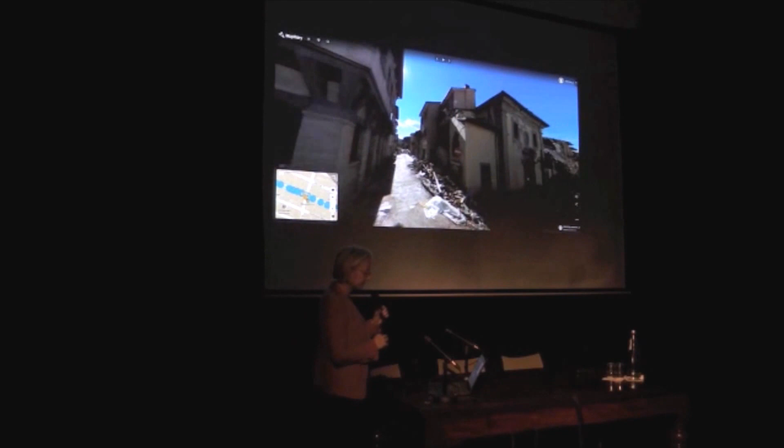Achieving this is possible for a new building. We know how to do it pretty well. It's more difficult to strengthen or retrofit an existing building to actually perform in the same way.

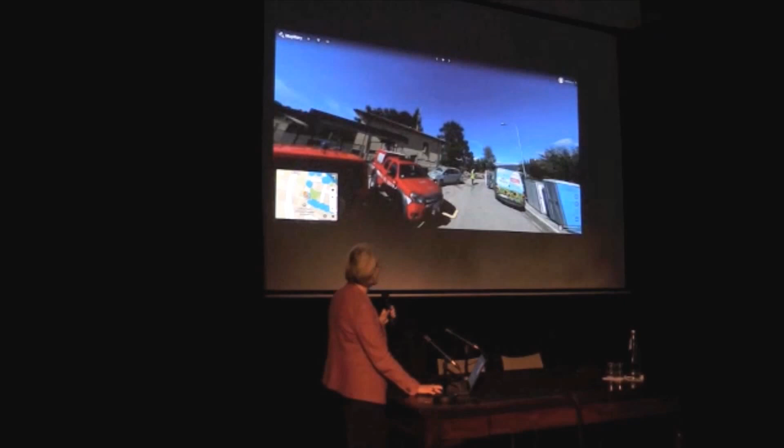And we have to say many of the buildings in Amatrice that you see on the ground have been retrofitted to a certain extent. So the question is why this intervention didn't work.

In the rest of my talk, what I hope to share with you is some evidence from past earthquakes of how far back the problem goes and what type of measures have been taken historically and also more recently. What is the typical recovery process, we'll see, and where we need specific knowledge and resources in order to ensure that the process takes place and concludes positively.

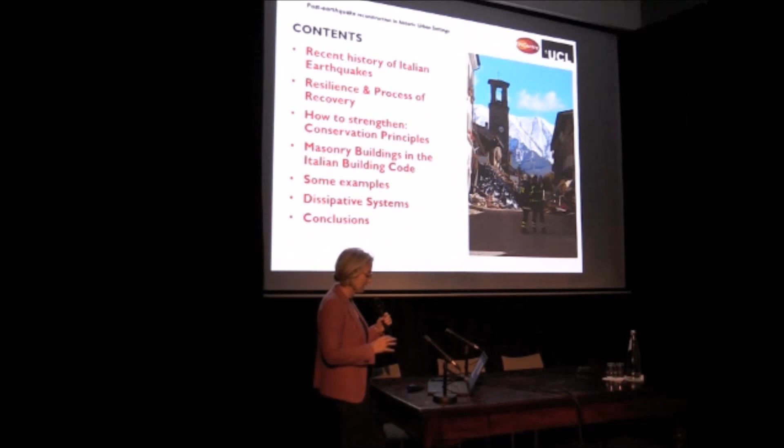We will then look at what are the Italian code provisions to strengthen historic buildings, and I will show you some simple examples from past earthquakes and also more recent attempts at strengthening buildings, including some of the research that we are carrying out at UCL, and we will get onto some conclusions.

If we look at our past, we can identify in the 20th century a number of earthquakes which had a devastating effect on the Italian territory, populations and economy.

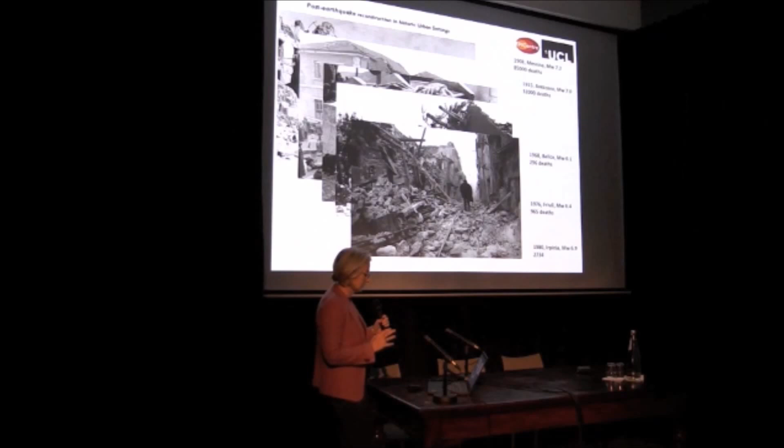As you can see from this photo and from the figures, although the magnitudes are not as strong as earthquakes in the Pacific, in Japan, or in the USA, in California, the effect has just been as devastating, if not more. I don't know how many in the audience have knowledge of these events, but as far as I'm concerned, it is after the earthquake in 1980.

As a teenager, I went there as a volunteer, and that's when I decided to become an earthquake engineer.

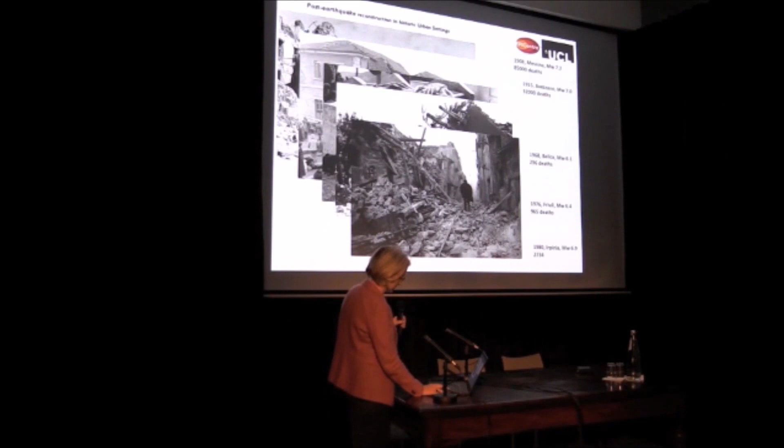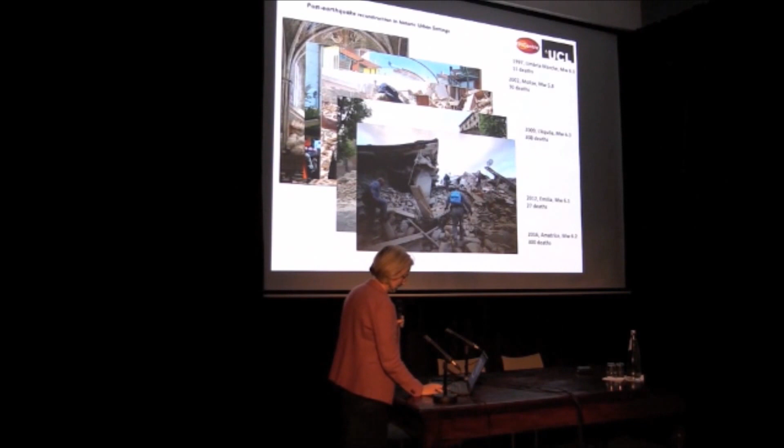Coming to things closer to our days, many of you will remember the collapse of the vault of the Basilica in Assisi, the deaths of several children in a school recently retrofitted in San Giuliano di Puglia, the death of several university students in L'Aquila in a reinforced concrete building that hosted a dormitory, the deaths of workers in reinforced concrete prefabricated factory buildings in Emilia, and finally the events in Amatrice that saw the death of many tourists who had gathered there for a pasta festival to celebrate the famous Amatriciana recipe.

The question is always why this happened and what are we doing to avoid this in future, and what have we done, and why are we not prepared.

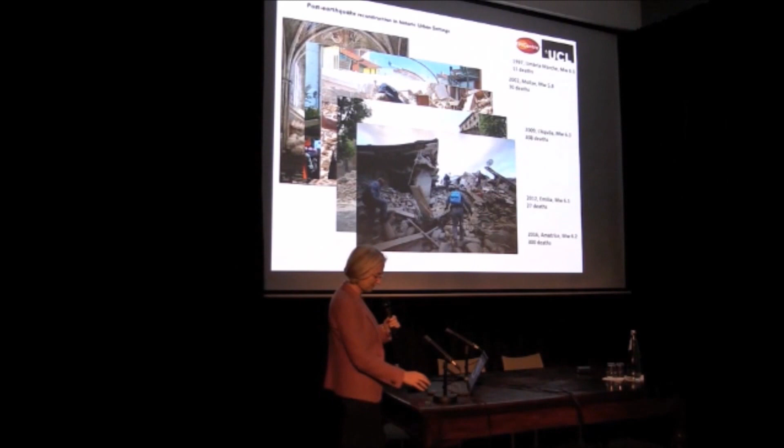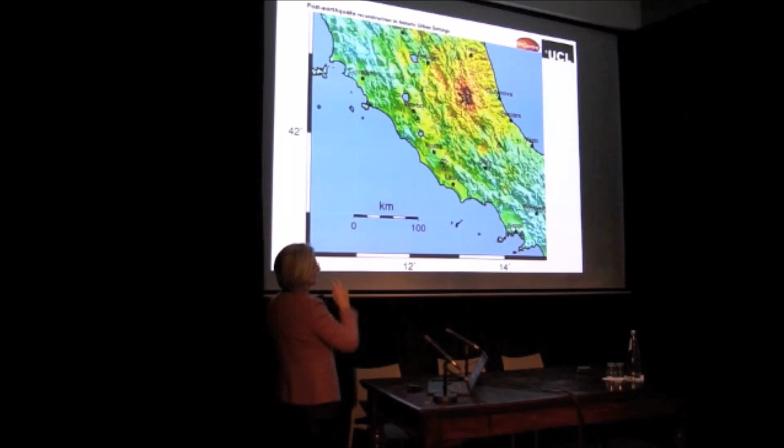But we can imagine that this is a relatively circumscribed and relatively isolated event.

However, again, if we take this slightly longer historical perspective, 40 years, you can then see there are 5 major, not so destructive events, but 5 events over the space of about 40 years: from 1979 in Norcia, then in Gubbio in 1984, in Colfiorito in 1997, then Gualdo Tadino the following years, then more recently L'Aquila, and finally the series of events of Amatrice, which I'm showing here from the 26th of August, but that was also followed by 2 other earthquakes towards the end of October and one more in January.

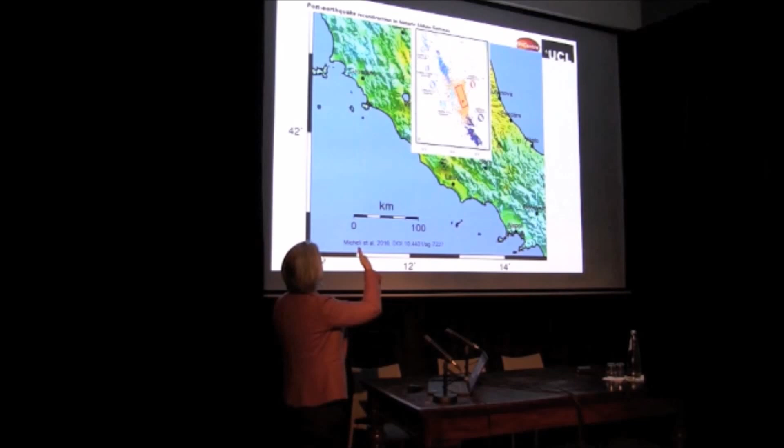So you can see that not only are the epicenters very closely aligned, those clouds of points represent the aftershocks, but also the aftershocks are very closely aligned, and altogether they very clearly identify the fault system of the Sibylline Mountains and the Monti della Laga, which actually historically caused all these earthquakes in this area.

So, knowing that there was an earthquake in Norcia in 1979, for instance, should have alerted the population, people, and authorities to the fact that there could have been an earthquake later on, north of it or south of it, and so on. And hence, did we prepare our buildings to withstand those earthquakes?

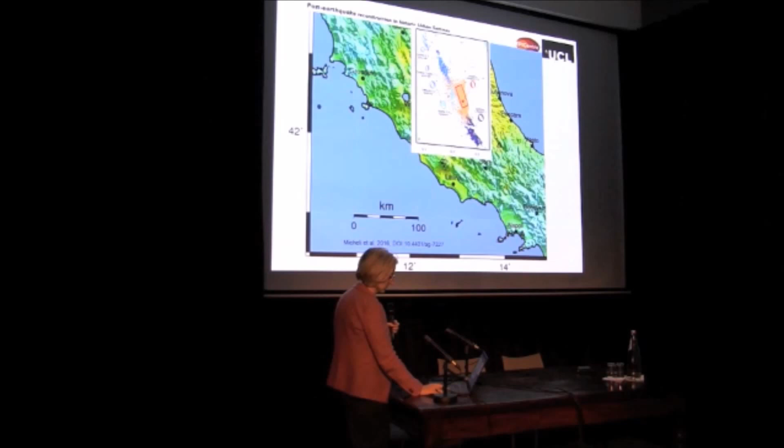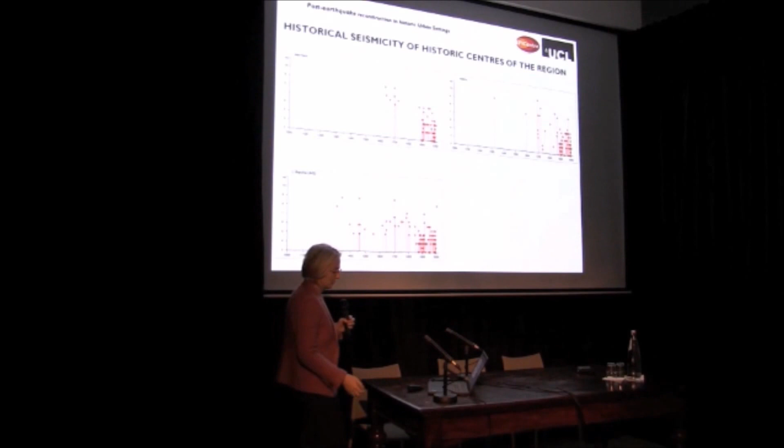Let's leave the end of the 20th century and go back in time. This is not new - we have records for Norcia or L'Aquila dating back to the 1300s. We also have records of these in paintings from the 13th, 14th, and 15th centuries, which show very clearly and pictorially exactly the same things we see today. So this has been happening for 500 years.

Our building stock is as old as these paintings in some cases. Very often when I speak to people from the United States or other countries, they ask: why do you keep living in these buildings? You know they are going to kill you. Why do you keep living in these buildings?

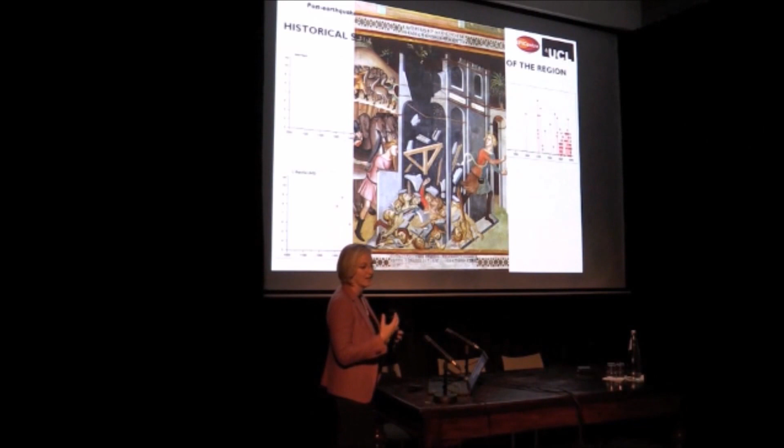The only answer we can give, to a certain extent, is that they are part of our heritage and part of our culture, and they represent, with their environment, the way in which many of us in Italy, but also in other parts of Europe, like to live. That's the main reason why we keep living there.

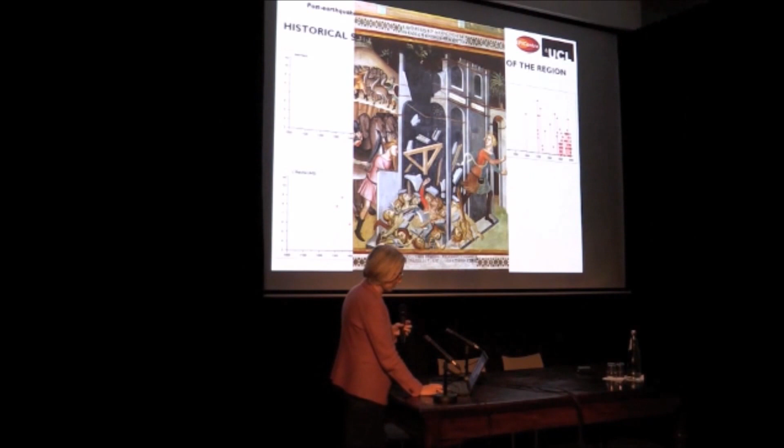But it is true that maybe we should try to do something about it. And indeed, we have done something about it as engineers.

The awareness of the seismicity of the overall Italian territory and the need to build better housing was first voiced publicly and nationally by Pirro Ligorio, in the 16th century. Later, after the earthquake in 1783 in Calabria, Italian engineers came up with what is referred to as Casa Baraccata.

Casa Baraccata was a system built in timber, meant as an answer to this very destructive 1783 earthquake to reconstruct Calabria. Some people say that the so-called Mezzogiorno problem in Italy can be dated back to that particular event.

However, in modern engineering terms, the concept of earthquake engineering and building to withstand earthquakes did not really meet scientific standards until 1908, after the Messina earthquake in Italy, but also contemporary with an earthquake in San Francisco in the same years, and similarly in Tokyo with an earthquake in 1923. So globally, the community came to recognize that something had to be done.

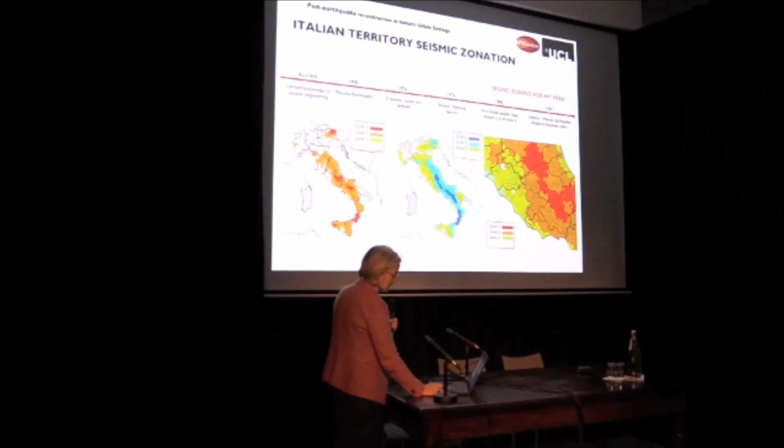And indeed, the problem becomes all the more stringent when we look at built heritage. What do we mean by built heritage? For the UNESCO definition, built heritage or architectural heritage is anything that has cultural significance - meaning it has aesthetic, historic, scientific, social, or spiritual significance, or any value for past, present, or future generations.

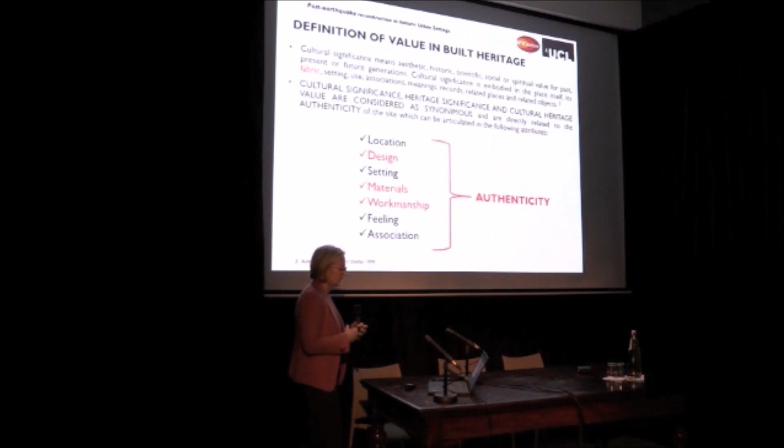Cultural significance is embodied in the place itself, in its fabric - meaning the materials and the way they are laid out - the setting, the use, the associations, meanings, records, anything related to the place and to these objects that we look at. This is the definition that ICOMOS produced within UNESCO.

In ICOMOS terms, cultural significance, heritage significance, and cultural heritage are synonymous. And hence, any building that has more than 100 years, by definition, because it's of interest for a past generation, a present generation, and a future generation, that is still standing, has some cultural significance.

From the point of view of how we identify that cultural significance, the keyword is authenticity. It has to be authentic, it really has to be what it was, and it continues to be. From an engineering point of view, the authenticity can be embodied in various elements, but what we are interested in is the design, the materials, and the workmanship.

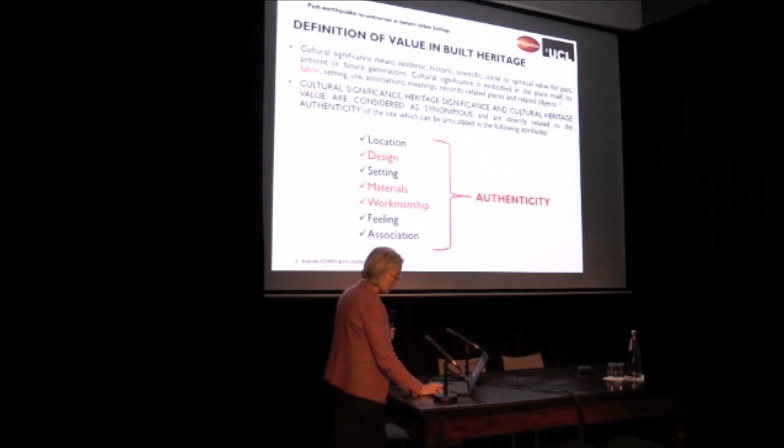That's what embodies what we call structural authenticity, or structural, and at the same time, structural integrity.

Why are these two concepts so important, and why should they go together? Because structural integrity allows the building to stand up and be reliable and safe. And structural authenticity provides, through the structure, the meaning and the value, the heritage value of that particular asset, object—in this case, a church.

What happens then is that we need to be very careful when we implement a strengthening procedure, because on one hand we want the authenticity to be preserved, so we shouldn't put in anything new or that falsifies the way the building works, the way it reacts. But at the same time, we need to preserve the life of the people who actually occupy the building. Hence, we need to intervene to improve a fabric and structure that we know very well is deficient, because this has been proven over and over.

So here I'm just listing some of the criteria that we, as conservation engineers, try to adhere to, among which the fact that the strengthening should be compatible with the original material, and should be durable so that it lasts and we can rely on it.

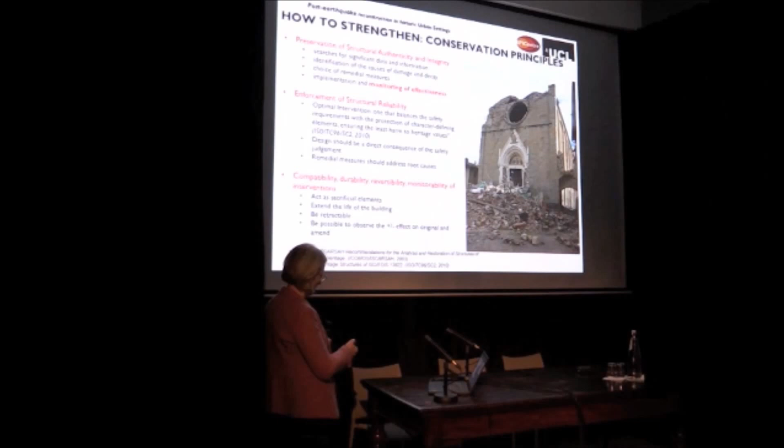So this is, let's say, what we try to adhere to in practice. I just want to show you here very briefly what an earthquake means for a building, or a number of buildings, and how we go back to what they were.

At time zero here we have the timeline: the building is damaged, so it loses its integrity and its capacity to withstand load. The day after the earthquake, we start with something we call tagging. Here we go around and say this building should be demolished, this building cannot be entered, this building is still safe and can be used.

We then start with debris clearance, and if the building is historic and valuable, we should also begin a process of documentation and storage—how many carved stones there are in this pile of rubble, that we would like to be able to reinstate once the building is repaired. What artifacts were in the church that need to be quickly removed and put into storage so they are not going to perish.

After this is done, we should be able to shore and make safe, which is something that didn't happen so much in this earthquake, while it was extensively implemented after the L'Aquila earthquake, for instance. There has been a lot of debate in the news and elsewhere about why this didn't happen. And we also need to demolish things that are not safe and that can fall on people's heads.

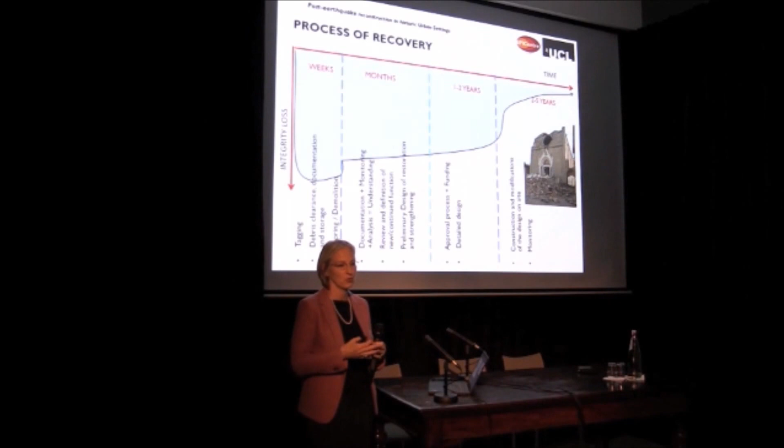Assuming that the funding process, either through governmental funding, which depends on the political system, then we can start developing what we call a detailed design, so start thinking specifically of what it is that we will do. And as you can see here, things can be done so that the building slowly is going back to its original state.

Possibly we start here in a space of 1 year, maybe we go on site and we actually build it up, and then slowly again the building is, maybe we will need to change things from the detailed design because again we find out new things while we are on site. And this process altogether might take up to 5 years.

Indeed, soon after the earthquake in Amatrice, there were some studies done in the Emilia region because it was just about 4 years after the earthquake there. And in many cases, especially for historic buildings, they are still in this phase. In the case of L'Aquila, we all know that 7 or 8 years have passed now, and possibly we are still in this phase for many buildings.

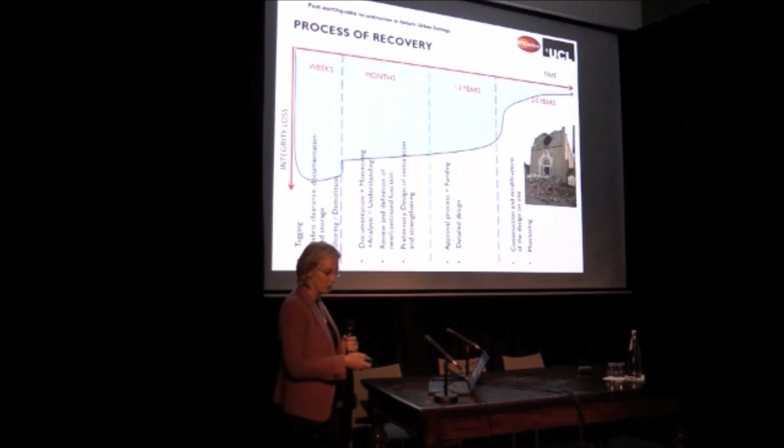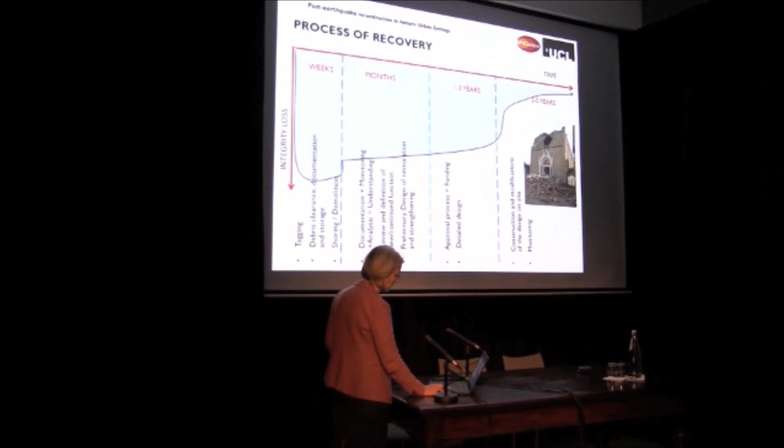So, although I've given a time perspective, this is not always responded to. So, what are we doing when we talk about preliminary and detailed design? What is it that engineers can come up with that can make buildings work better? Now, like with everything else, the technology moves on with time, and we find out, for instance, that when you have a hip replacement...

Well, the metal head was a good solution in the 80s because stainless steel was supposed to be the best thing possible. Later on, they substituted that with titanium. Then they found that titanium was very heavy and it produced a lot of problems for the muscles. You were not quite able to lift your legs anymore. And so now they have replaced this instead with FRP, fiber reinforced plastic, which is as light as bones, and possibly, we don't know whether they will wear out quicker than titanium, but if they were, they will replace the hip again, possibly.

And similarly, in earthquake engineering, in the 70s, all our knowledge was based on reinforced concrete. And there was very little understanding of the relationship between our reinforced concrete work and our masonry works. And as we were able to design nice reinforced concrete frames that withstand earthquakes, we all thought that, well, let's put as much reinforced concrete in a masonry building, and if we stiffen it enough and we give it a certain box behavior, it's bound to work well.

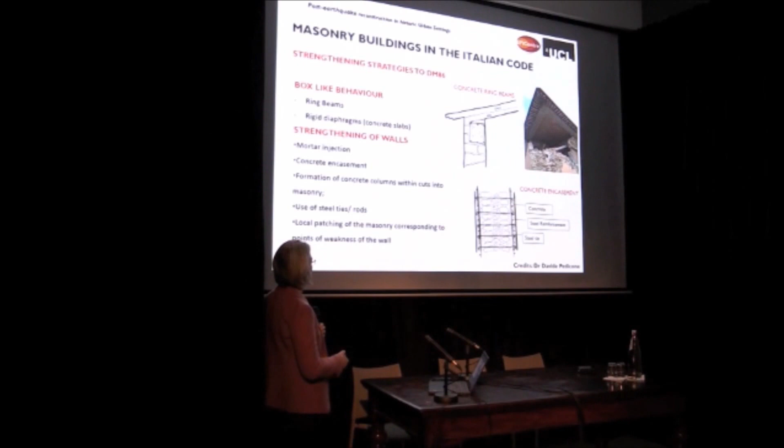And so away we went with what we call a ring beam, nice roof plate made of concrete slabs, with any walls that was made of stones and mortar. We sort of shotcreted or covered it, encased in concrete, in the understanding that the concrete will do the work where the masonry was not capable of doing it.

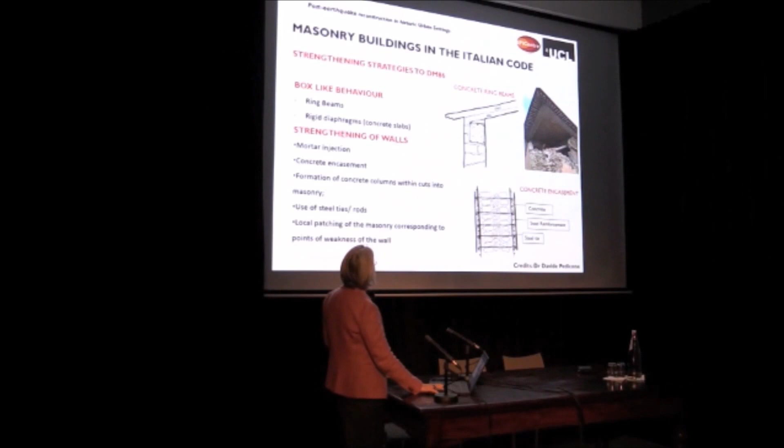Other types of intervention, and these strengthening strategies were recommended in the ministerial decree of 1986. So after the 1997 earthquake, there was clear understanding, and there was plenty of evidence that actually this type of strengthening didn't work well.

For instance, the collapse of the vault in the Assisi Basilica indeed was due to the presence of a very stiff ring beam with roof slab, which caused the failure.

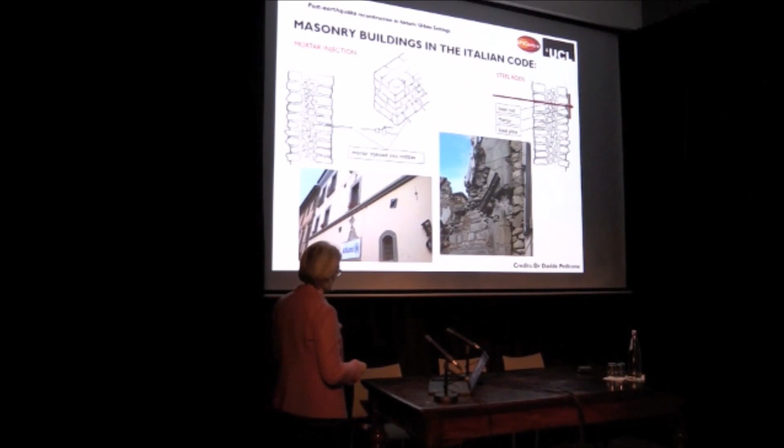Things that in the meantime we found out that might work better is to actually inject the masonry with what we call mortar grout, which works better in connecting the stones there, but still relies on the stones and the mortar to do the job rather than external concrete. And also, we realized with some work done by my group and others, that ties, which were already used since the 18th century, are actually a very good tool to make the building behave.

If we needed, as I said, there was already evidence in the earthquake in 1997 that ring beams didn't work, and in fact in the L'Aquila earthquake in 2009 we had confirmation of this, because basically all the churches that were damaged in the L'Aquila earthquake and the main Duomo, the main cathedral. You can see the ring beam here, and you can see what that caused.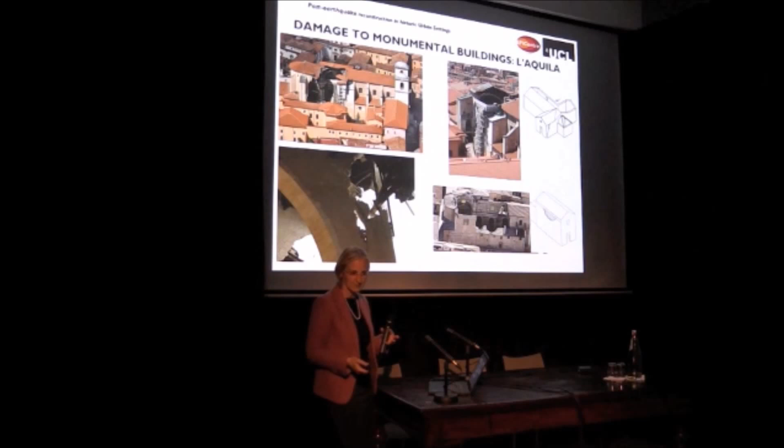This is the Collemaggio Basilica, where you can see the ring beam hanging from its reinforcement out of the top of the arches, and there is a big gaping hole similar to this one. And this is the Santa Maria Paganica church, where again we have exactly the same type of damage and the same type of reinforcement. All of these roofs were substituted between the 60s and the 70s in the genuine belief that it would improve their behavior.

Again, further confirmation of this we had in Norcia. This is what is called the Contro Cattedrale, because it's built just in front of the main cathedral of San Benedetto, which collapsed. And here you can see that there are buttresses in this wall, which were inserted in the 18th century, after the earthquake in 1703.

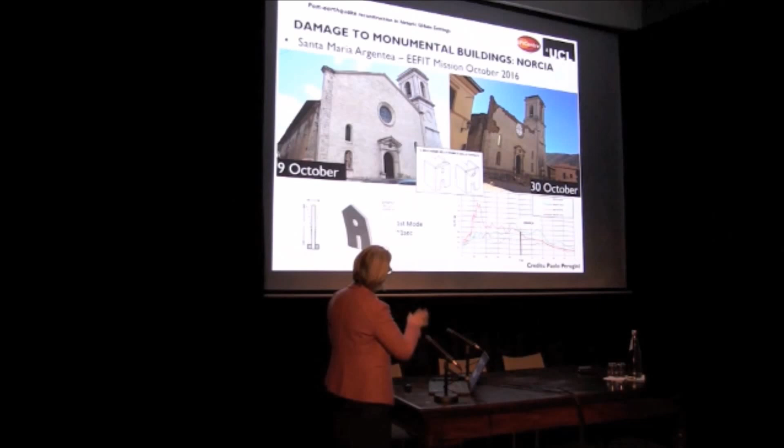This wall is still standing, and the campanile, which is all tied up with anchors, is still standing. The facade, which is behind here, and the reinforced concrete and steel structure that was supporting the roof, was actually damaged in the earthquake of October. There are also some other more technical reasons why the damage occurred, but this is not so important.

This is a building in Arquata, which, as you can see, is in very poor condition at our visit 2 months after the earthquake. This building is very interesting because virtually every single reinforcement and strengthening device that the engineer thought of through the time had been included in this building.

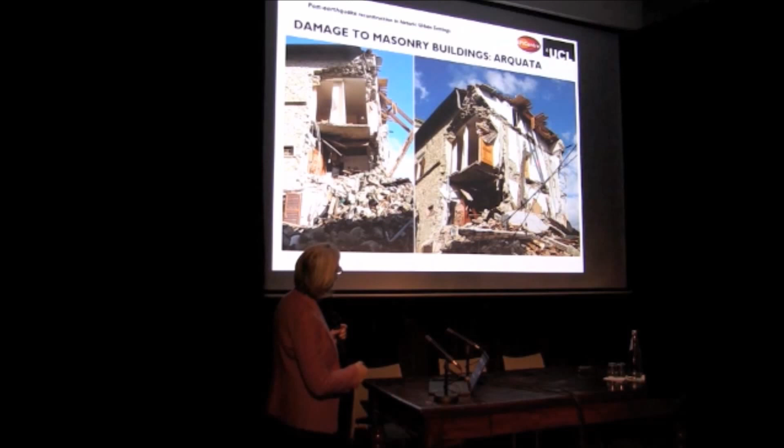At this level we have reinforced concrete slabs. Then up here in front we have some anchors that didn't seem to work well. Then later on here you might see some joists that are coming down. And if I change picture and we look at the other side of the building, you can see the joist hanging here. So this was basically a very modern type of reinforced floor.

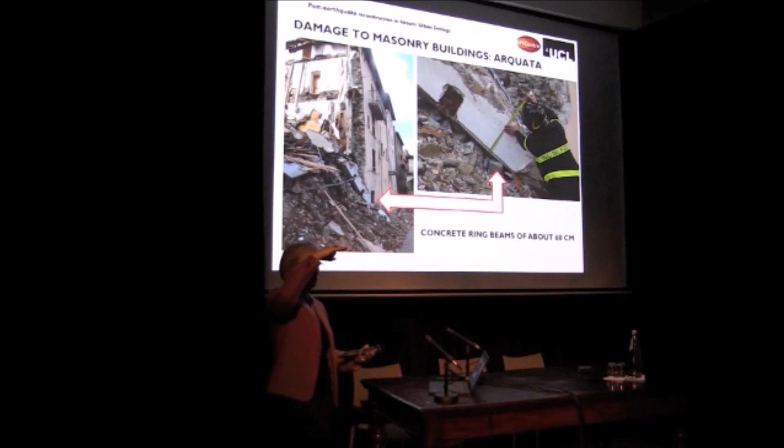And here you can see these are the spaces for the roof beams, and this is a concrete ring beam which has come down 4 stories, so about 15 meters, and it's like 600 millimeters deep, made of concrete, which is very heavy, on top of masonry, which, as you can see, is made basically of very round stone and mortar. So the surprise is that it stayed there for 30 years, not that it came down.

And the first shaking, unfortunately. But of course, it's very easy to make judgements with hindsight. And so one needs to be very careful.

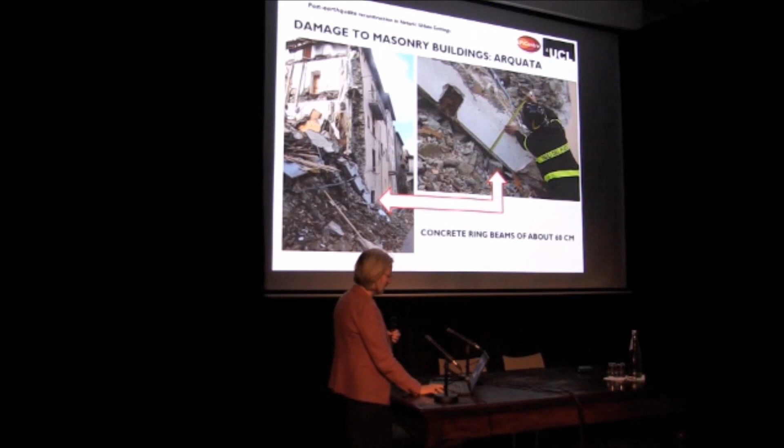More recently, after the earthquake in 2009 and with the research work that we have done in the last 30 years, we have identified a number of things that work and don't work. So we have, for instance, identified a way of obtaining the same effect of the concrete ring beam without putting a concrete ring beam, simply by improving the way in which the top of the building is built in masonry. For instance, using FRP, fiber reinforced polymer strips.

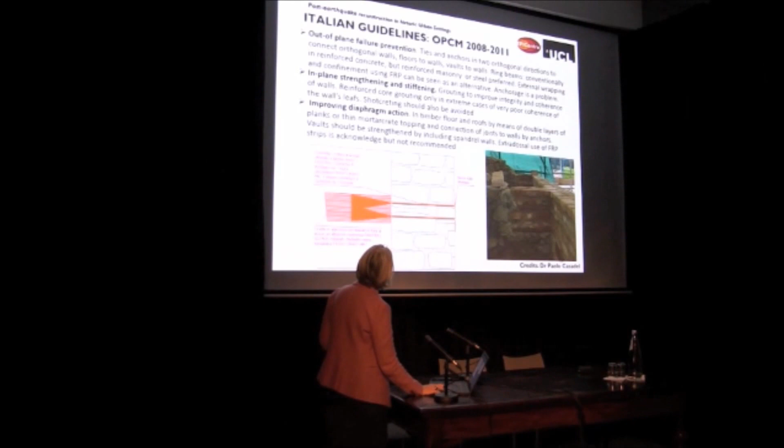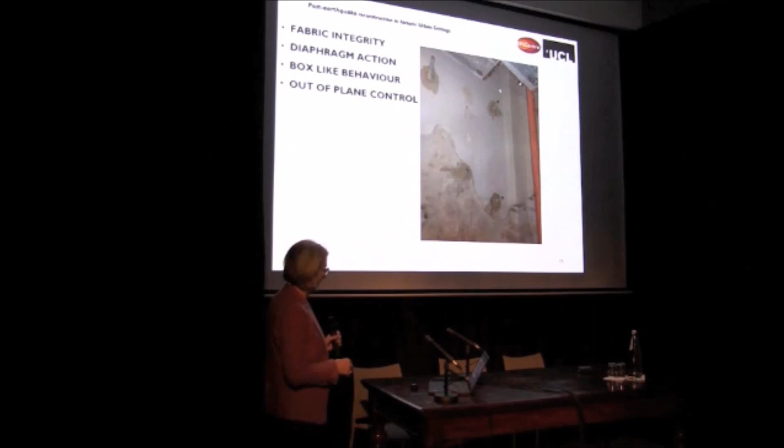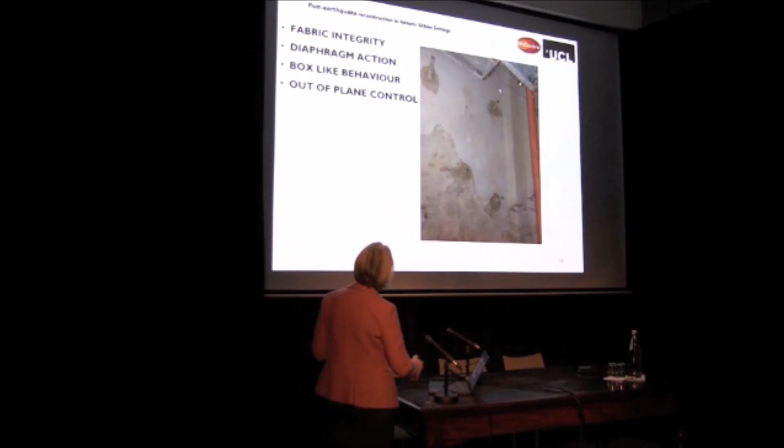However, when we went on a visit 2 or 3 years ago in L'Aquila, when we were looking at some historic buildings that were restored, we looked at buildings being grouted, and this seems to work well. But although the code recommendation says that this type of intervention is not recommended, there is no proof that it works. It's extensively done because it's very cheap, quick, and doesn't require as skilled labor as putting brickwork here to reinforce the walls.

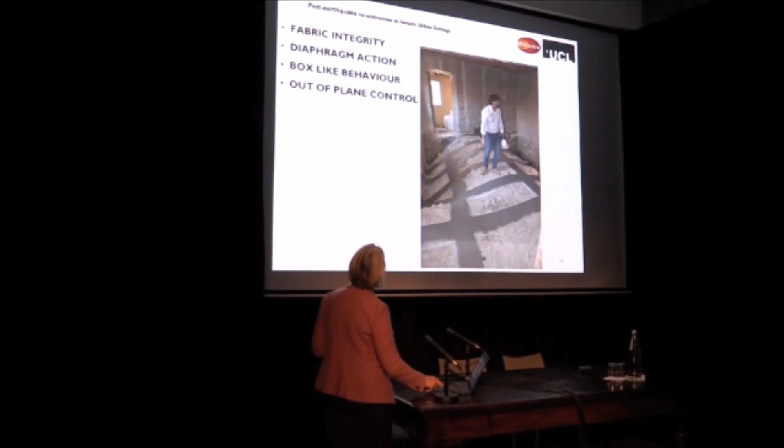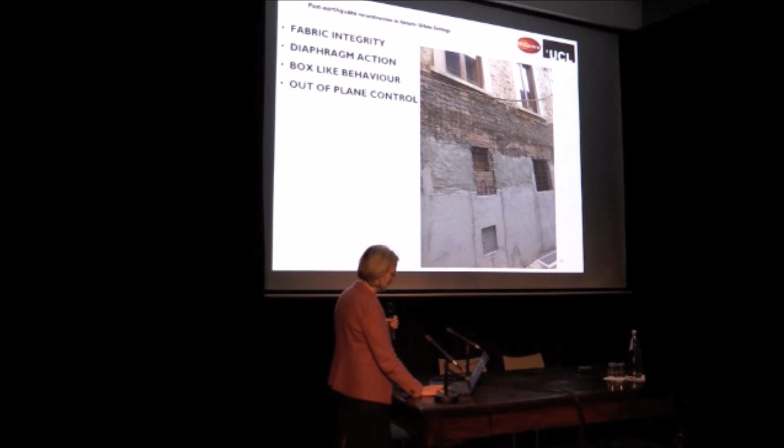People still coat their masonry in concrete, although there is plenty of evidence that this doesn't really work well. So there is also a matter of how we educate and improve the understanding of the profession at large in order to improve the behavior.

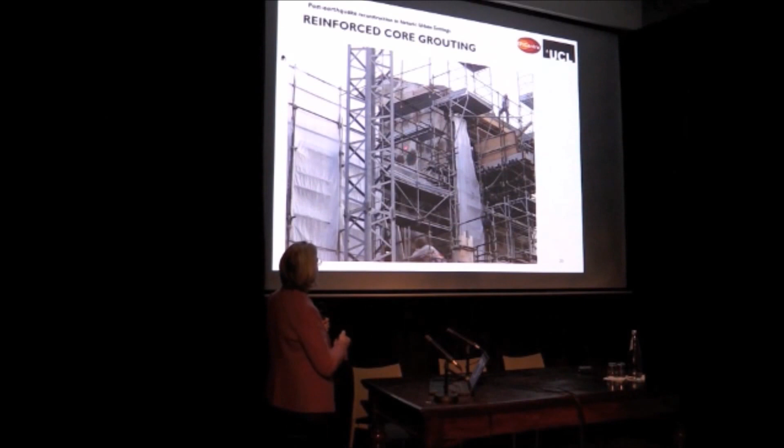This is an intervention in L'Aquila using a very recent technology, which is the use of FRP, basically drilling through the thickness of the wall and then inserting FRP bars and post-tensioning them. The idea is that this should be more effective. You can see here where each of these stains on the walls is actually an FRP bar that has gone through. This is a close-up of it so you can see how it works.

There is no evidence that this is actually going to work. Nobody has tested it properly. However, in L'Aquila, almost all the buildings have undergone some of this work, just because the contractors know how to do it. Somebody, the supplier, sells the FRP, and this is what is being approved.

And of course, when you look at this, this is a building of the 18th century. Think about the authenticity and think about the maintenance of the historic value of this building.

There are things done properly. This is Palazzo Ardinghelli, still in L'Aquila, and here my colleagues have gone back to the idea of the ties and the anchors, the traditional anchors, and simply used them in a more systematic way in order to obtain a systematic response.

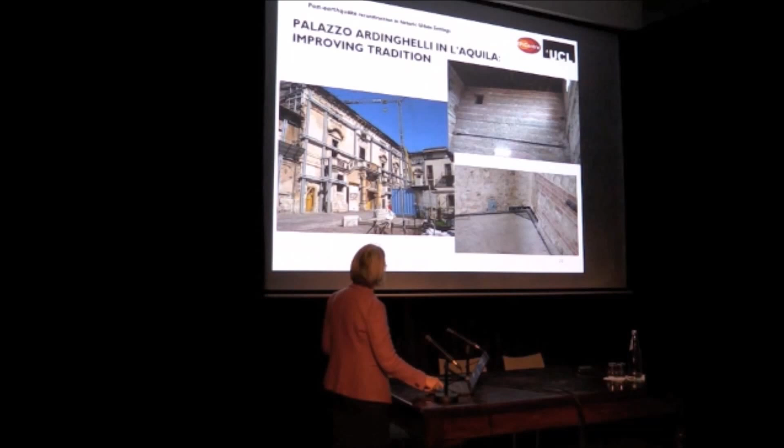And this is the finished product, and you can see they are quite unobtrusive. You see very little of them. From an architectonic point of view, they don't disturb the facade. It's not too bad. And next to it, you can see a building that had traditional ties in L'Aquila.

As you can see, this building is still standing, so people have been able to evacuate safely, to come away with their life. However, the building is seriously damaged to a certain extent, irreparably, and hence it will need to be either newly restored or very seriously altered.

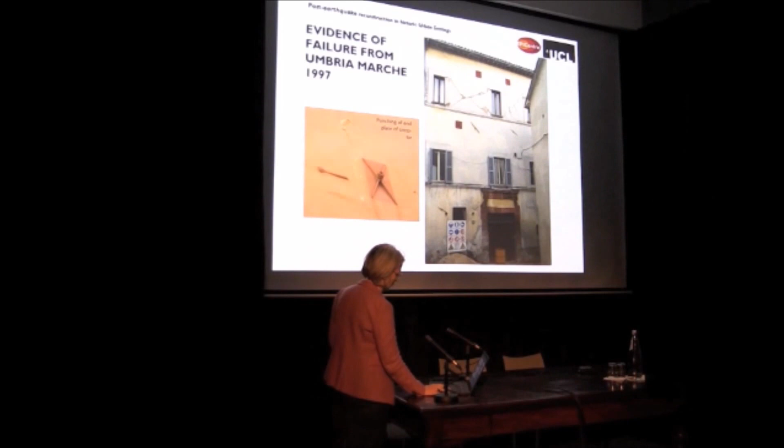So it's with this in mind that recent work that we are doing, work that we started in 2010 when I was at the University of Bath, that we are now bringing forward at UCL. We work on what we call a dissipative device.

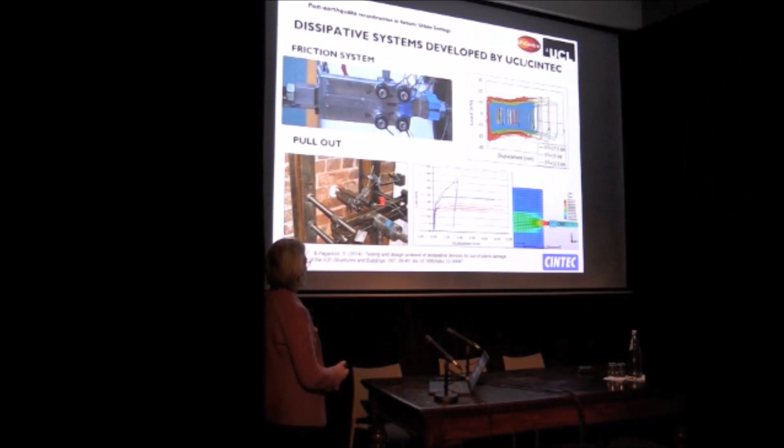This is a friction device that we can put in series with traditional anchors, and simply when the earthquake, when a force is exerted more than a certain amount, it will start sliding and in this way start dissipating. This object has already been patented.

In order to make sure that it is a feasible pursuit, we have had the possibility of putting it in situ in a building that had been damaged in L'Aquila, in the oratory of San Giuseppe dei Minimi, and you can see here there is a very clear crack that separated the main facade from the rest of the building.

So we inserted our anchors, which is this one. This is the front of the anchor that goes on the facade. This is our device here, and this is the back of the anchor that goes into the side walls. We inserted it here.

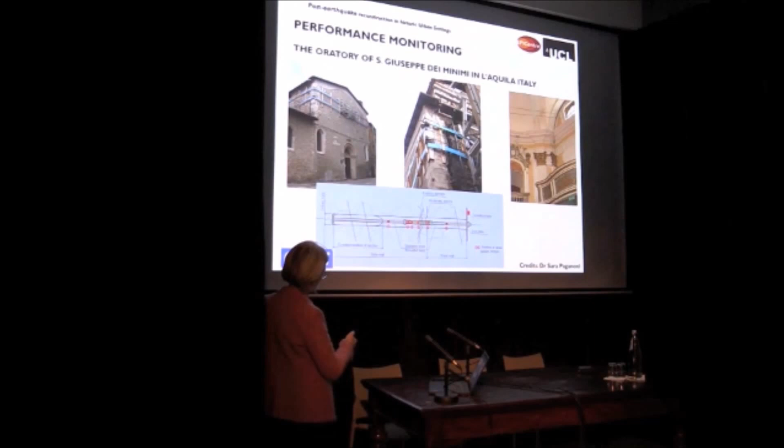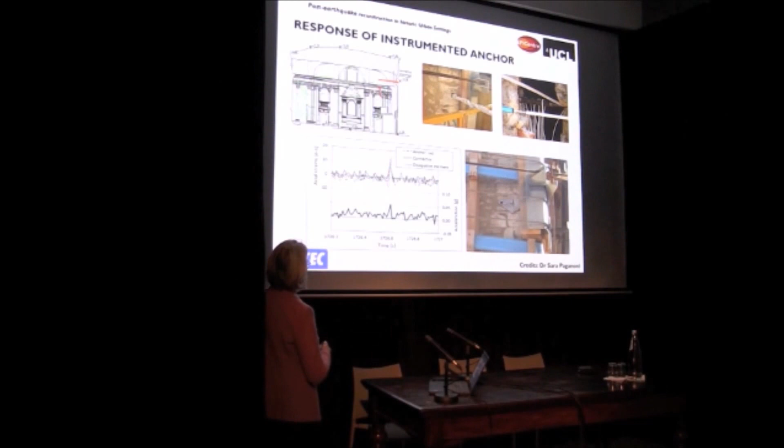And we instrumented the anchor so as to be able to see whether it's effective when there are tremors. We managed to pick up some tremors during the year in which it was kept in place, and we can see that the dissipative element is responding more than the other elements, actually dissipating more energy than the other parts.

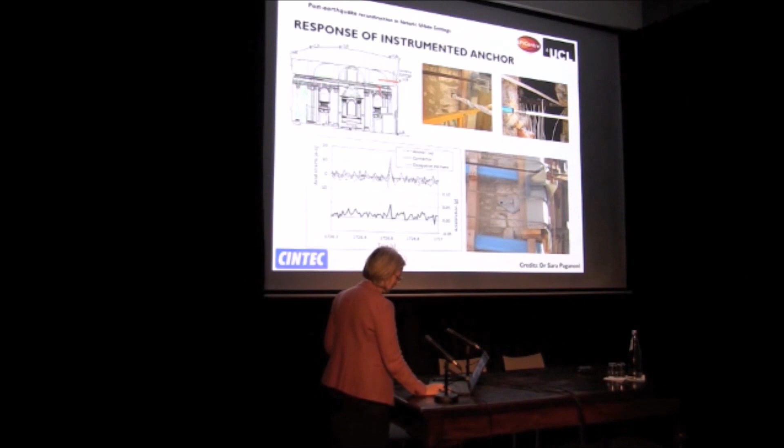This is one particular case that proves things up to a certain point, but we are in a position to simulate the behavior of these objects with numerical analysis and also with laboratory testing, and hence determine the behavior and arrive at a situation in which we can design each of these interventions building by building specific, and manufacture them in such a way that they are specific to the buildings.

This really concludes my presentation. Just to say that the earthquake engineering community indeed has shown an increased sensitivity towards the importance of preservation of historic buildings, and promotes research into the assessment of new strengthening methods.

This is reflected in the code provision, although we are not quite there. As I said earlier, the real issue is how to train and how to update the ability of people on the ground. It's good that in academic circles we do these things, but it has to get to the single building.

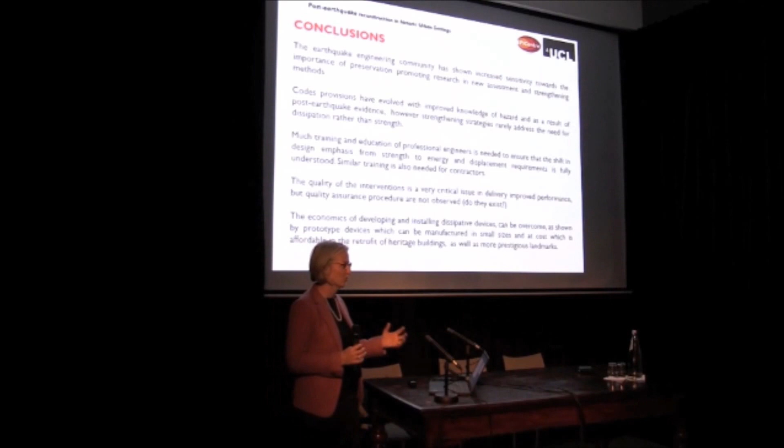A very critical issue is how the interventions are implemented and the quality control behind the contractor. When you have a large number of buildings that you need to retrofit or repair, it's very difficult to control that each and every single one is done properly. I don't know whether in Italy a control system exists and is effective on the ground. It exists, of course, on paper, whether it's effective on the ground is also a problem not just of Italy, but any other country in the world.

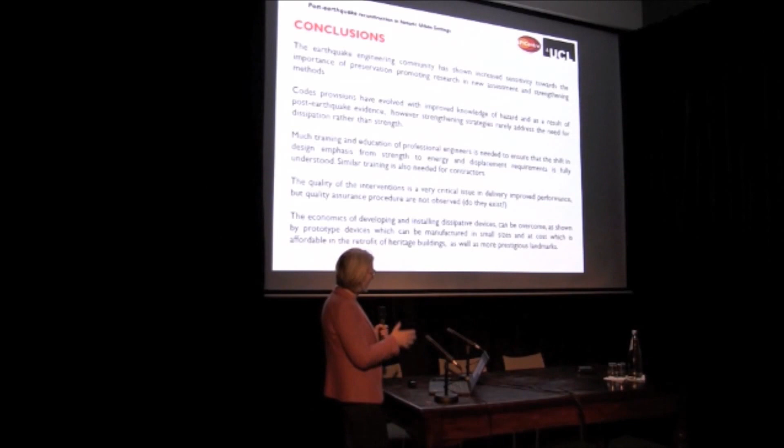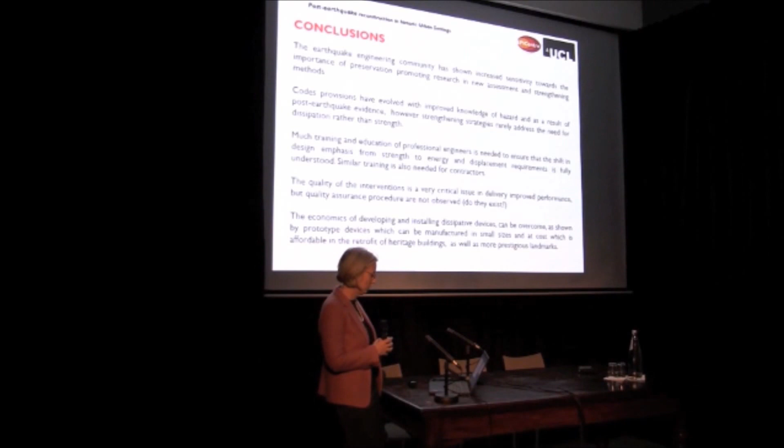I think we are proving, and that's why we are now investing more efforts and money in further developing these devices, that they can actually be a new and more efficient way of preventing damage in historic buildings. Thank you very much.

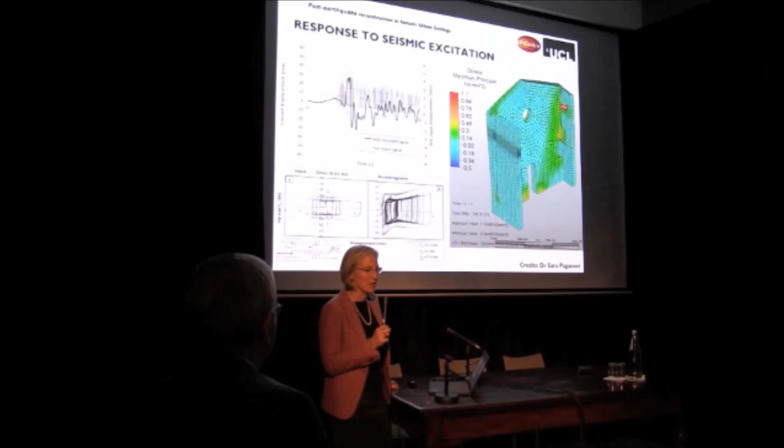Yes, to an extent. Of course, we don't really call these simulations, we call this numerical analysis, which is a slightly different thing than a simulation. It depends, of course, these are models, and when you model something, you are abstracting from reality and reducing it to something you can actually deal with using your tools. So by default you are eliminating some issues, you are simplifying.

Nonetheless, the numerical tools we can use nowadays are quite sophisticated, and as long as we have sufficient documentation and information to put in as correct numbers as possible, we will have responses that are credible and realistic. So when I initially mentioned the period of study, documentation, collection of information and so on, which can take some months, this is exactly to produce, for any specific building you want to intervene on, the set of data and information good enough to warrant going on to do a study of that type. These simulations, this is a relatively simple model we're showing here, but they can become quite complex and take quite a length of time to produce results. So it's worth investing in something like that once you have good enough information to put in.

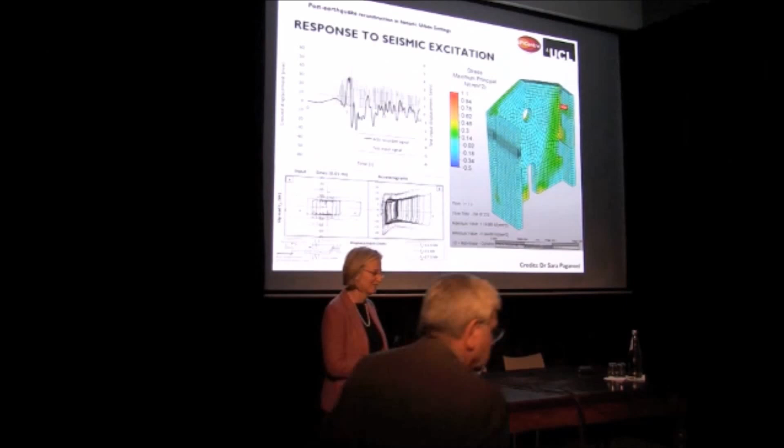Thank you. I don't know anything of the subject, so just a really simple question. I guess there are two ways in which the soil itself, the nature of where the earthquake is taking place, can affect: A, how a building is affected, and B, how it's reconstructed. I always thought the more flexibility a building had, the better in it not falling down. On the other hand, if you have very movable soil, like near a coast, you would imagine the whole thing can collapse more easily. When it comes to building, how do you take the soil into account in terms of achieving that optimum flexibility without the risk of it being very difficult?

Yes, well, this is a very pertinent question, and it's very difficult to answer in a few words because it requires, let's say, a whole program in earthquake engineering, as some of the people here have gone through. But nonetheless, I'll try to explain it as clearly as I can in a few words.

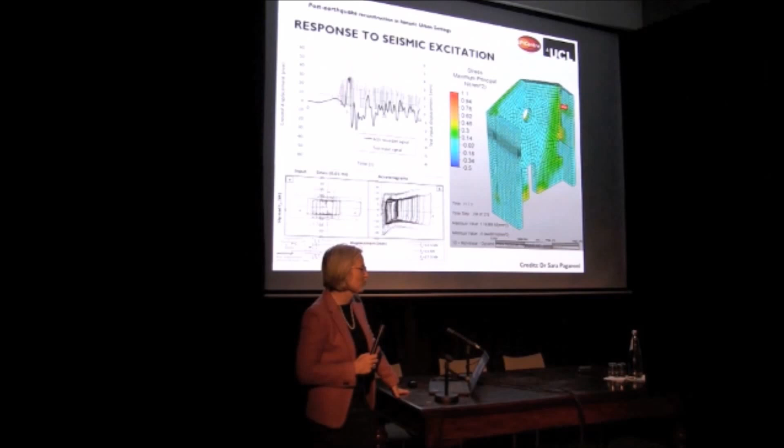Italy has had earthquakes, as you illustrated, for hundreds of years—we have records that go back to the Romans, and in fact before the Romans. And still today we have very damaging earthquakes where people lose their lives. Now, if today you had enough money to fix all the buildings—has somebody evaluated how much money is necessary to fix all the buildings in the seismic area of Italy, which is essentially all of Italy? Because otherwise, next time an earthquake comes, no one has done anything. So how much money is necessary? And the second question: once the money problem is solved, is there a consensus on how? Is there a consensus in the scientific community on what should be done? Because from what you say, I have the impression that not everybody thinks the same way. So if somebody has enough money to fix the entire central part of Italy where there is this serious problem of possible future earthquakes, would there be a consensus on what to do?

Okay, again, two very interesting questions. I think the National Association of Engineers made a rapid calculation after the earthquake in Amatrice and came up with a figure of something like 89 billion euros—I don't know why not 90, but 89 billion euros—which is a considerable amount of money.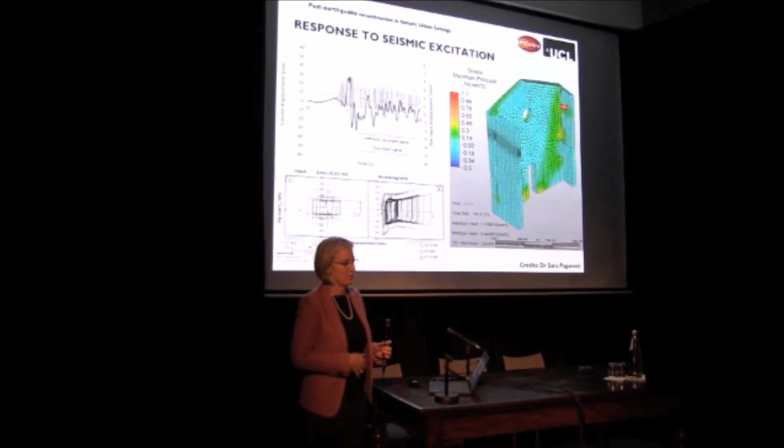Money for retrofitting, as I said, after the 1997 earthquake and after Amatrice was reclassified, they received money to retrofit their buildings. Now, some did, some didn't, and the building came down anyway. But almost all the cases I've seen, the retrofitting with the 60-centimeter concrete ring beam that I've shown you was so that you could gain some space under the roof and, to all extent, have another floor to rent. So it's an investment, but you are playing with your life.

So are you ready to do this? I think it's until there's a more widespread safety culture that it's very difficult to implement a proper program of retrofitting.

In terms of the community, I think that, as I said, at the academic level, there is substantial agreement about what works and what doesn't, mostly agreement about what doesn't work.

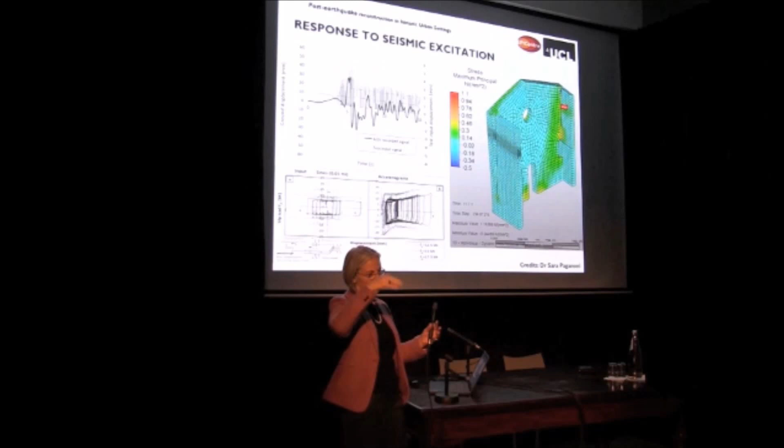This is a very acute observation, because what we have seen both in L'Aquila and in Amatrice is that in 3 to 4 story buildings, many have collapsed, but the ground floor, which was vaulted, is still standing. This is because typically that vaulted first floor is built with very large walls, so the vaulted structure doesn't have much of what we call thrust - it pushes, but the wall is capable of taking that push. Also, buildings at ground floor are very often built one against the other, so they are very stable.

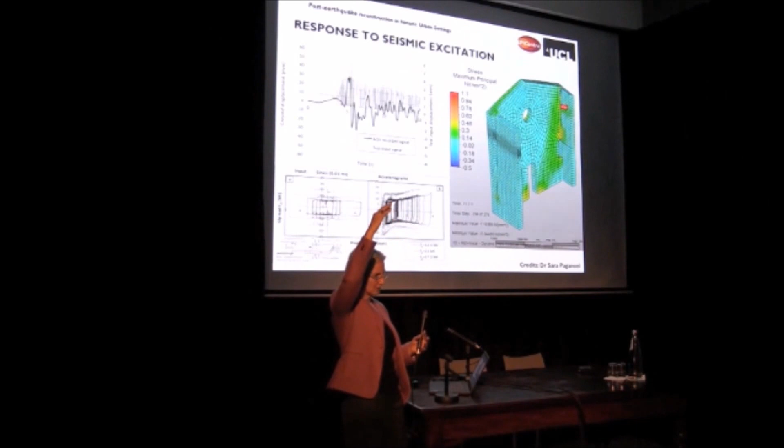As you go up in stories, in some architectures you will also have vaulted structures at a higher level, although they tend to be thinner. For instance, in L'Aquila, you would have it at the first, second, third story, but they will tend to be very thin, cross vaults and so on. In churches, if they are not properly buttressed and propped, they become a liability. So are you saying the ground floors withstand it better simply because the walls are much thicker, not because of the vault?

No, not necessarily because of it. I always thought the forces would distribute better if you have a pointed arch, for instance. Yes, to a certain extent, yes, but not... Well, a flat floor costs much less to build - you just put some timber and some planks - and it doesn't necessarily work worse if you tie it with anchors to the walls.

Can I ask you another question related to what Roberto asked at the beginning? You made the analogy between hip replacement and... if I have a hip replacement, I hope I won't, but if I do, and then I do an X-ray to see whether the hip has been put properly - what can you do to see whether works to fix buildings are done properly? Do you have proper instruments?

In this field we are really borrowing from medical technology and medical science, and we are indeed trying to use X-ray, but they don't work very well in masonry, or better, they don't penetrate very well. For instance, if you are looking at timber for nails or steel connectors, X-ray is a good thing, but in masonry it's not so good.

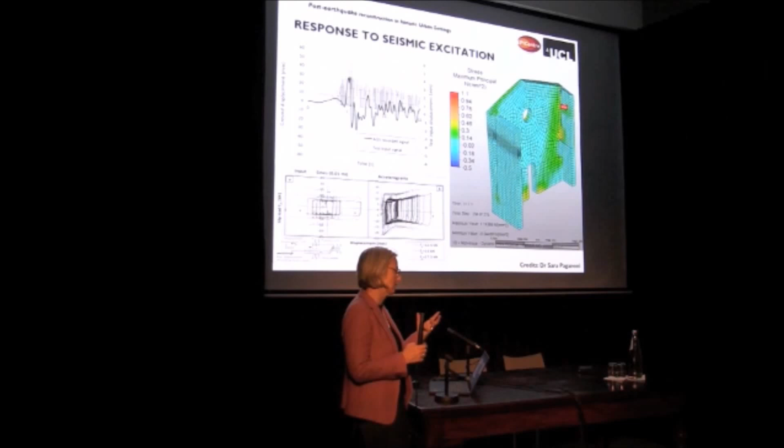You imagine the jack of a car - you put some oil, pump it up, and it goes up. This is flat, like this, with some oil in it. You cut the mortar and fit it into the mortar joint, then start pumping, and that gives you a very good idea of how strong the masonry is and how it holds together, and what its characteristics are. So there are ways of monitoring and testing, which we call non-destructive testing, although in some cases it's a bit destructive.

Right, last question. Sorry for the others.

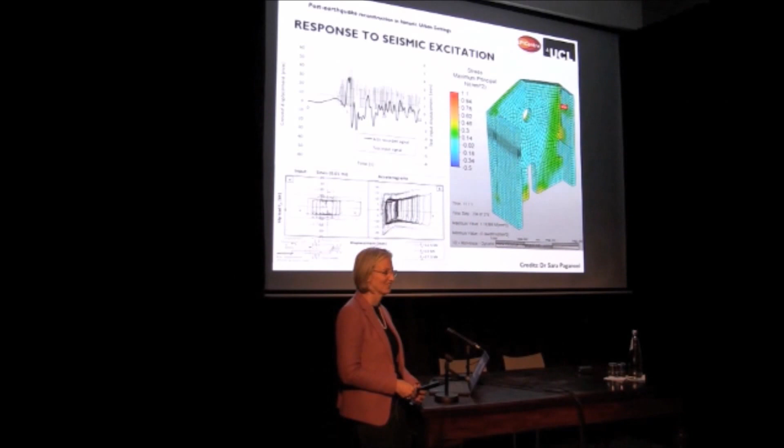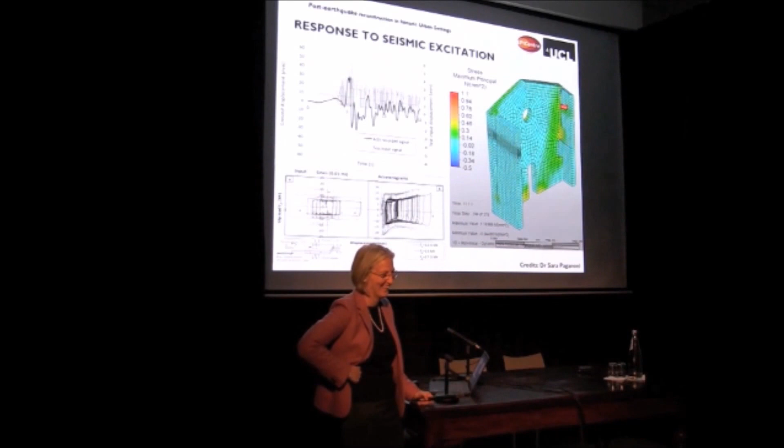My question, because it's the last one, may I raise two questions, but very quick. So, the second to last is, why doesn't the ring beam perform well?

Because from what I've been told, they are the key in allowing the natural structure to work as a 3D structure, to distribute forces, to connect the slab with the wall. So I've been taught in that way. But maybe my professors were... well, yes, this was the knowledge that we had in the 90s. So why don't they work?

Just a quick one about the FRP technology. I would assume if the technology has been tested, proper procedure, European technical approval has been done, I would expect that should be fine to adopt those technologies. So either those procedures haven't been followed properly, or they've been followed but there was a random problem anyway. Or what do you reckon is the problem with FRP?

In the case of FRP, there is some work that has been done. For instance, it's applied quite extensively on reinforced concrete structures. In the last 20 years, a large amount of testing has been carried out, a lot of trial and error, design and so on, to arrive at very rigorous guidelines on how they can be used. These guidelines have European approval, US approval, and are now used worldwide. Now, the fact that it works with reinforced concrete structures, beams and columns, doesn't mean it works as well with rubble stone walls. There hasn't been the same level of testing, investigation and proving as for concrete framing. So I'm not saying they don't work, I'm just saying we should be cautious.